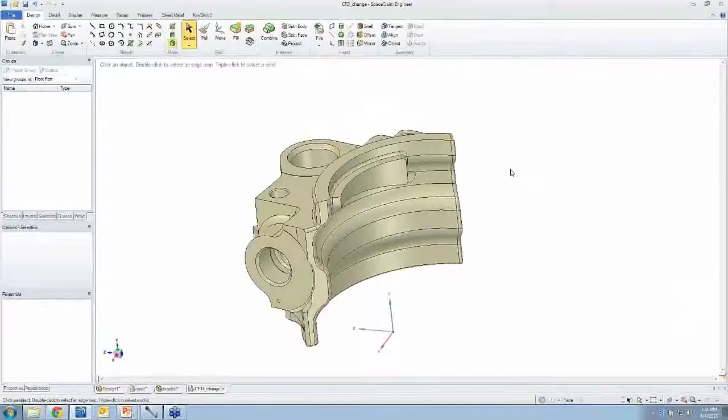The scenario here is you've got a housing where fluid is flowing through it, and you need to make a new design, a new concept for something. The new design needs the fluid flowing through it to be similar, if not the same, as this one. How would you transfer the insides of this to a brand new model and start chipping away at the outside to get it looking just right?

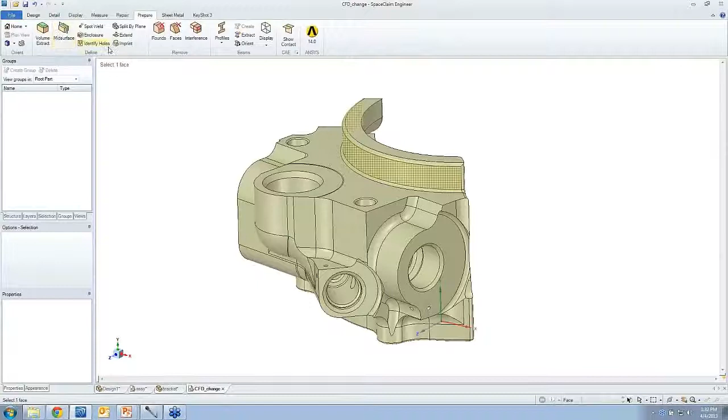That's really not a way that someone would necessarily design, but SpaceClaim is a game changer. It really turns the whole paradigm of modeling upside down.

So I mentioned I want the volume of the inside of this to be the same as on my new model. How would I extract out the volume? This is something we've seen as problematic with CAD tools at large, but in SpaceClaim we've got it down to just a couple of button clicks.

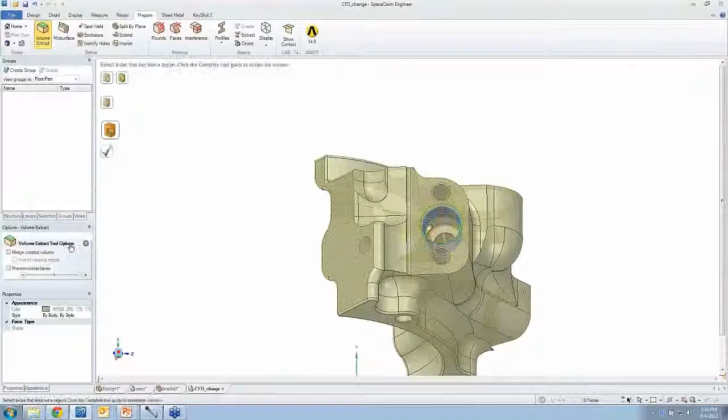There's no complicated Boolean operations. This volume extract tool does exactly what it says - it makes a solid body out of everything on the inside. Now this is something that I might want to optimize.

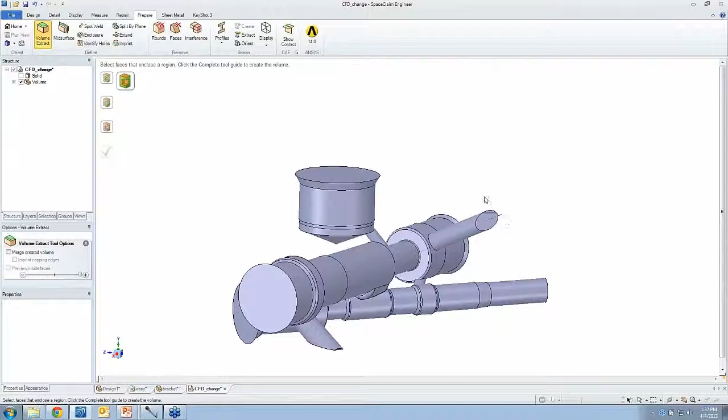There's a couple of small ports running through these three smaller diameters. The endpoints of those are really inconsequential - I don't really care where they are. So for that purpose, I'll just extend out the ends and make sure they extend plenty far. But I care about the general location of them, if that makes sense. So I'm just pulling on them, getting them to extend out far.

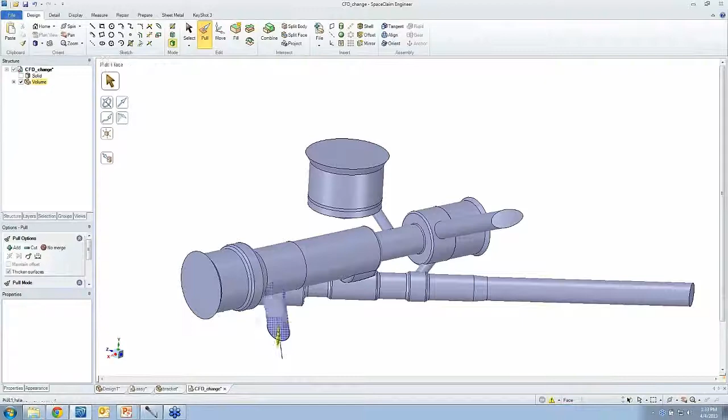There's a little small face right there that may get in the way. Well, that's not a problem - I fill it in, I get rid of it. I'll pull on that last one.

So part of what I might want to do for simplifying and tweaking the inside and optimizing it - there's a few diameters I might want to get rid of. So simple to do - I grab the faces of concern to me and fill them in. Let's make sure I get that last one.

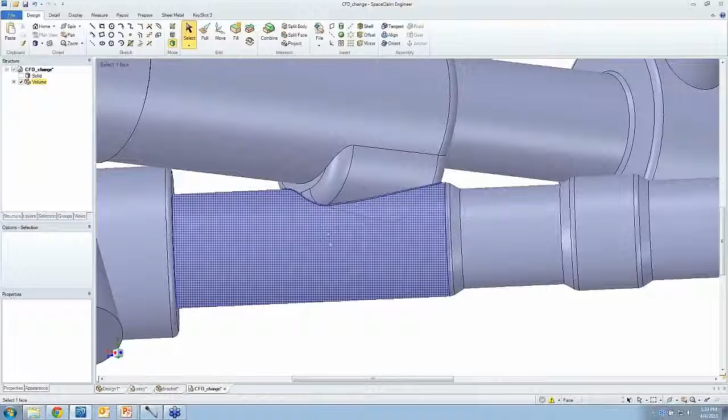When I click this fill tool, it's so great - it's just great to be able to modify this the way I do. That diameter extends over. And bear in mind, this is something I didn't create - this is just a solid generated over the course of a couple seconds in SpaceClaim that's the resultant of everything on the inside.

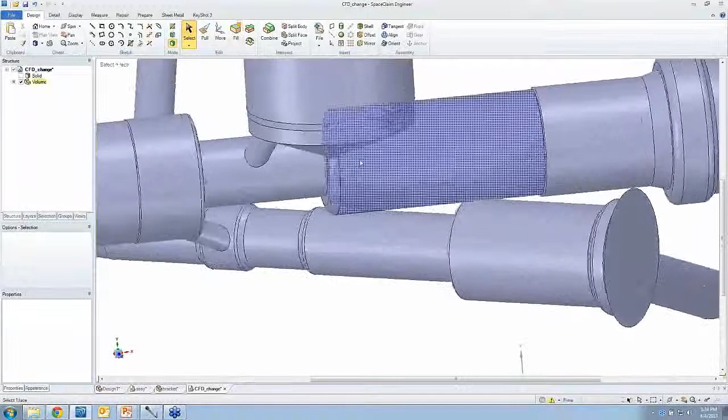It's this common volume right here that connects the two tubes. That's the one I might want to optimize and sort of start over and make everything a little bit bigger. It's great to be able to say, let's just grab that whole thing and fill it in and kind of start over on the common volume.

So maybe I decide to pull on these a little bit and extend the diameters a bit, and I need to make a new - again, the goal here is the volume that's going to connect these two tubes. I want it to be a little bit bigger.

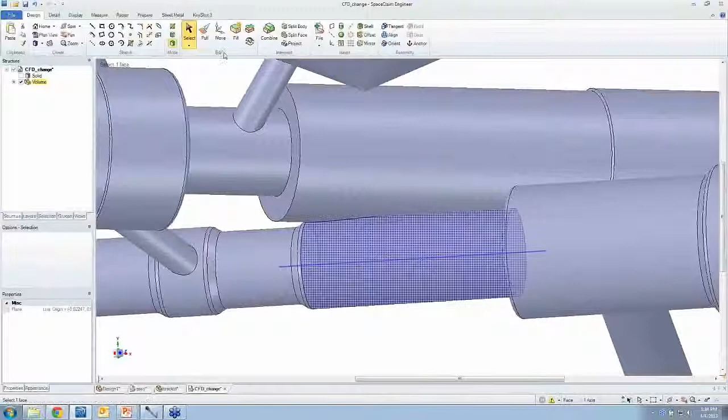Now, one of the ways I like to work on models, I haven't really shown this yet, is to go into what we call a cross-section mode. Great for visualization - it's great for seeing areas that would be difficult, if not impossible, otherwise. And in cross-section mode, we also let you create geometry.

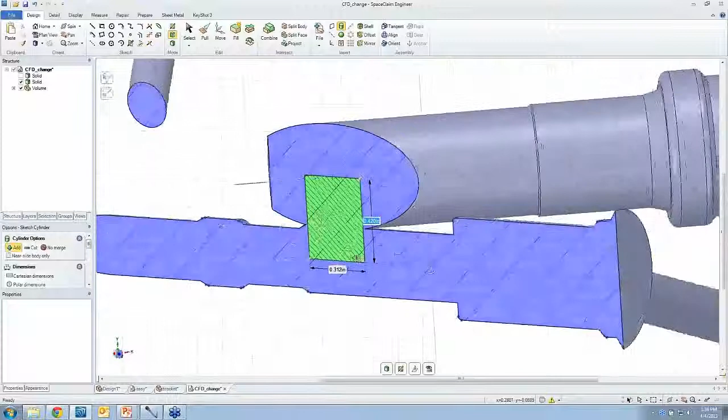I'm just creating a primitive cylinder - that's all it is. It looks like a box right now, but if I rotate around and maybe go into a 3D mode, you can see that clearly is a cylinder. Alright, so what am I trying to do here? Well, I want to take that cylinder and make it a little bit bigger.

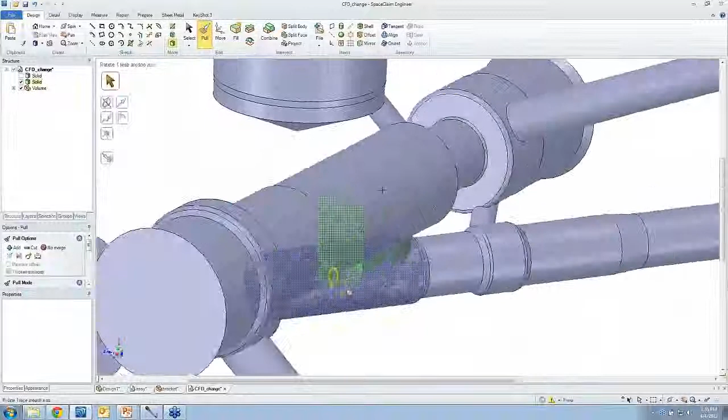So maybe I'll pull on the axis and turn this into something that's like a slot, or the reverse of a slot. I'll go in that direction about as far as I think it can go, zip around to the other side and pull on this axis as well, and make this one go about as far as it can go as well. And I'm going to just leave it right there.

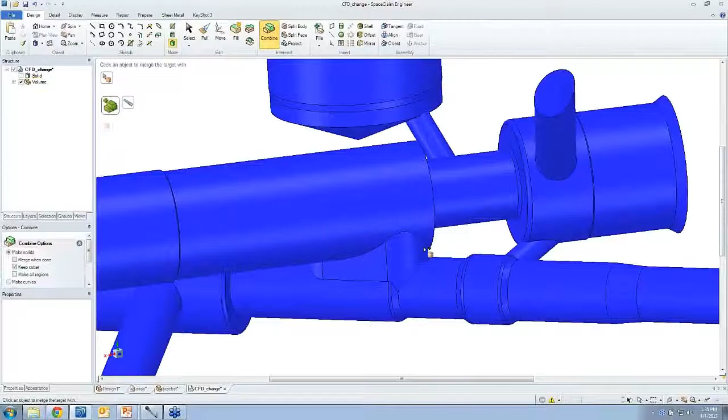That's a solid body all by itself, sitting out there. What I want to do is merge it to the original body - so easy to do with that combine tool. And now I've got a brand new common volume that connects the two.

If this isn't what you want, you can always run through a different iteration. And obviously this is going to have some rounds along the perimeter to smooth things out. We'll call it 0.010 of an inch, something small. Try that bottom one again.

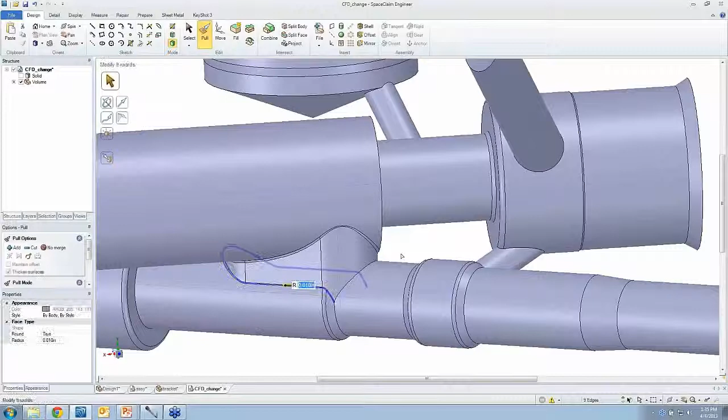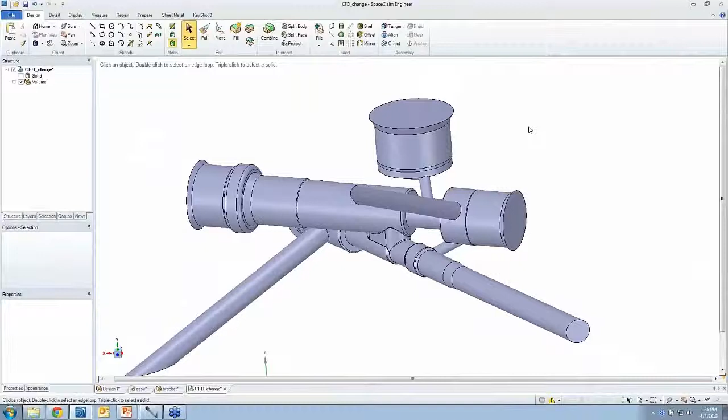So, very easy to do. Alright, there's a lot more changes maybe you'd want to make for optimizing this, but let's just keep it simple and say this is the brand new inside that I want my new model to have, because maybe you've tested out the flow of something, or you think this is generally the direction it needs to go in. Well, let's open up a new model, and I've already started this ahead of time.

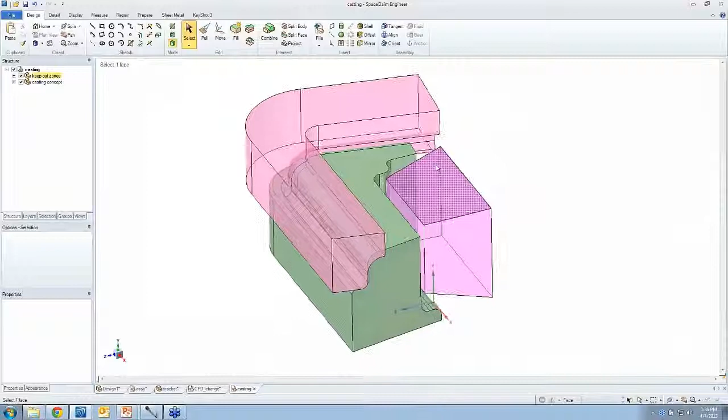It's very primitive, but the green represents the new model, and it's very blocky in nature right now because all I did was take into account some keep out zones, which is everything in pink. I've constructed just a primitive model around it. I can hide those for a moment.

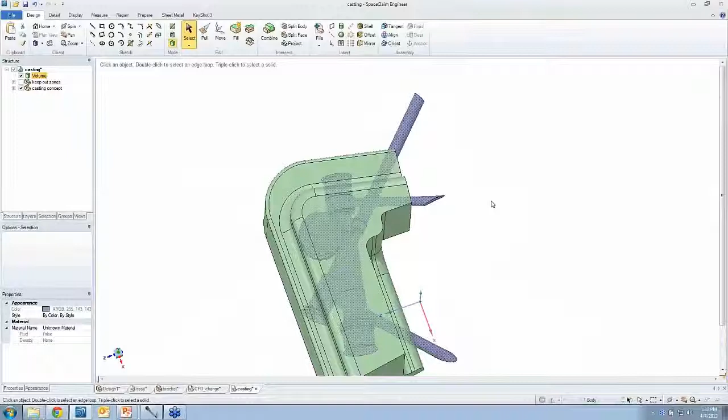But what I want to do is take this volume that I just worked with and, same as before, throw it into this model and copy and paste it. Alright, so you can see the volume sitting inside of the solid. These are just two independent solids at this point. And how do I make sense of this now?

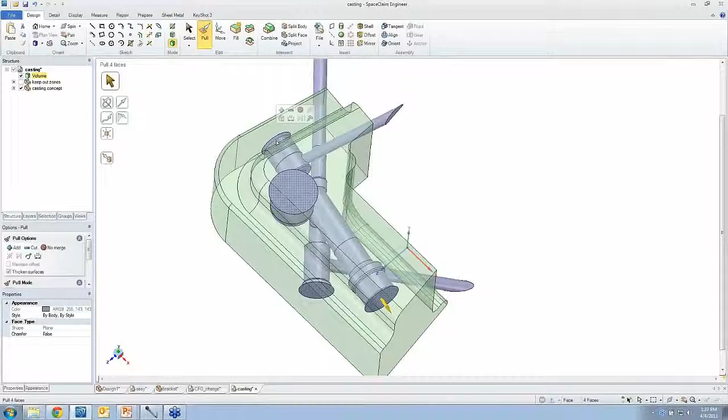Well, probably one thing to do to start would be turn this into a transparent model and start making modifications to it. You see, I've got counted 4 main ports. I'll select them all right now so you can see them. 4 main ports that need to have an opening, or the solid needs to have an opening available for all those. So that's where I need to start doing my modifications.

Well, this is where the direct modeling tools in Spaceclaim just come in so handy. I'm able to snap faces up to those ports. Now, it's a little bit trickier over here. I've got to decide how I want that opening to look like. And again, this is concept modeling, and because of that, there's really no right or wrong answer.

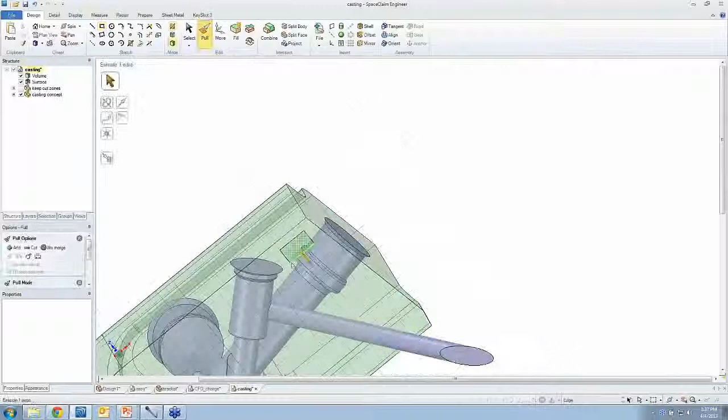You can start anywhere you want. I've just drawn a box somewhere and pulling that through and making a cutout. Now you might be wondering, well, why did he make a box and a cutout right there? Well, again, I go back to there's no right or wrong way. That's just a starting point to get me close to where I want.

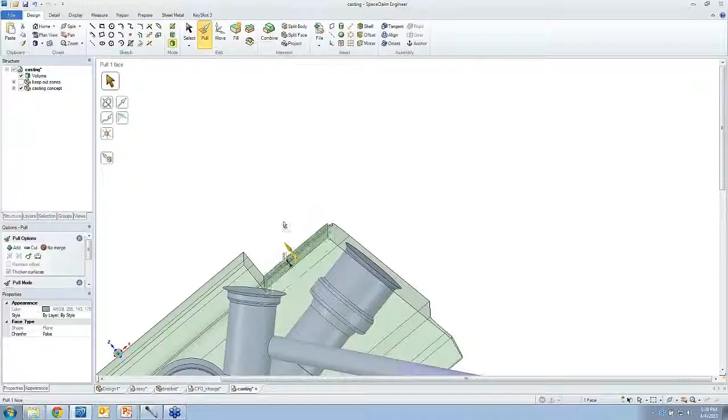Now I pull on faces, get them in close proximity. Let's snap this face up to that one port, and I'm going to say that looks good. But notice the port doesn't have a clean opening on this face. Well, one thing I could do, and I've seen a lot of designs like this, is to have something that looks like a counterbore opening.

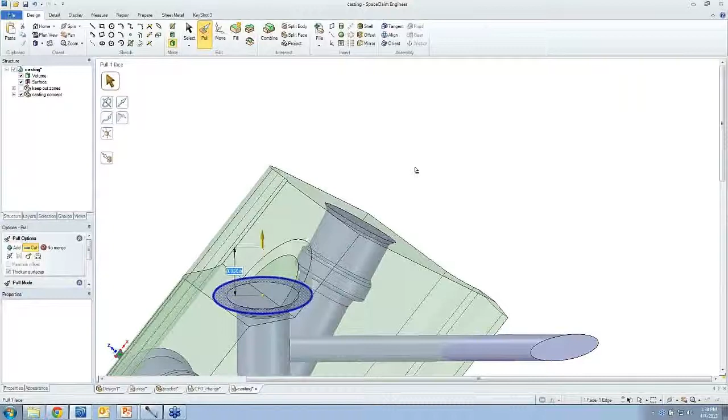That's not a problem to do. I just need to tell Spaceclaim to utilize some data around me, some geometry around me, and start pulling that through. Now I've got a clean opening for that one port. I just took some faces I didn't want, a feature, and filled it in.

It's so easy. It's like working with Play-Doh. I was about to say clay or Play-Doh. I sliced off those faces right where I wanted them to go. You know, the same thing over here, this port as well.

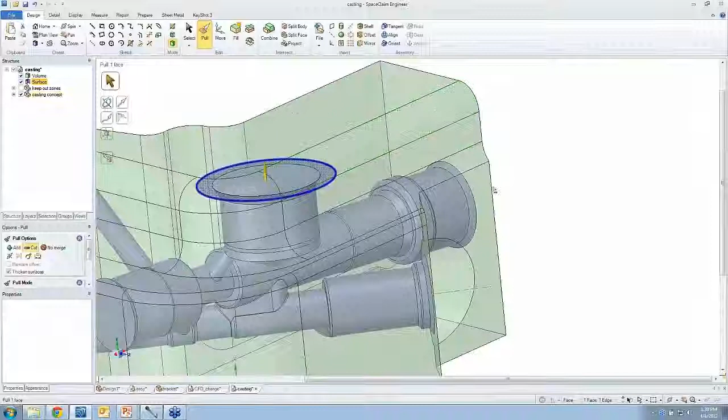That may need to have a little bit bigger of an opening than it does. Easy to do. I tell the system, make a nice cut right through there. And there's a couple of green faces I don't want. Let's fill those in. And there's a nice opening for it. Same thing over here, the last one, the fourth one.

Pull that face over. Obviously, a lot more things you'd want to do to optimize this, but hopefully you get the idea. If you want to put rounds on given faces, on given edges, sure, you can do that. That might be a step you do later on or earlier on, or whatever, but you're free to do it. You're free to model however you want.

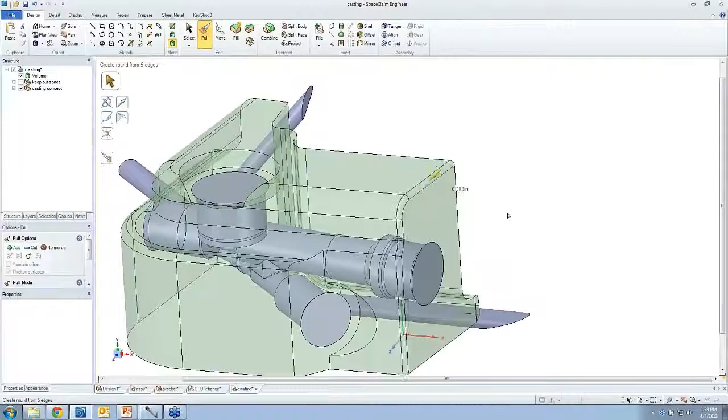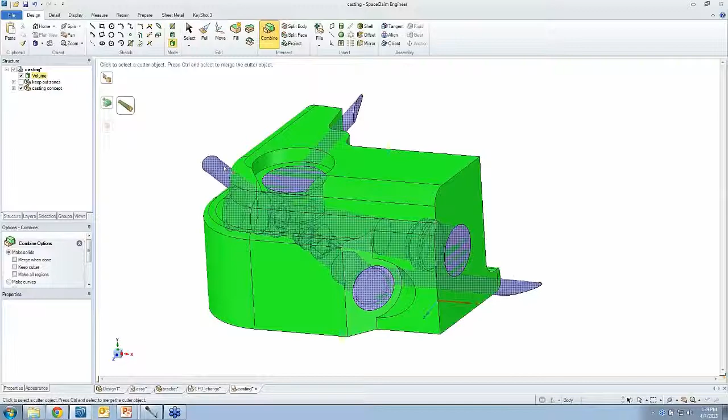Now, let's bring this back to something that looks more opaque. The only problem I have is that I haven't cut anything away from the model. The volume was just sitting there in space. So that combine tool, I showed you how it merges things, but it also cuts bodies up. Let's use it to cut out from the solid the entire volume. So that could be your brand new model right there. The exact volume you need has been hogged away from the center.